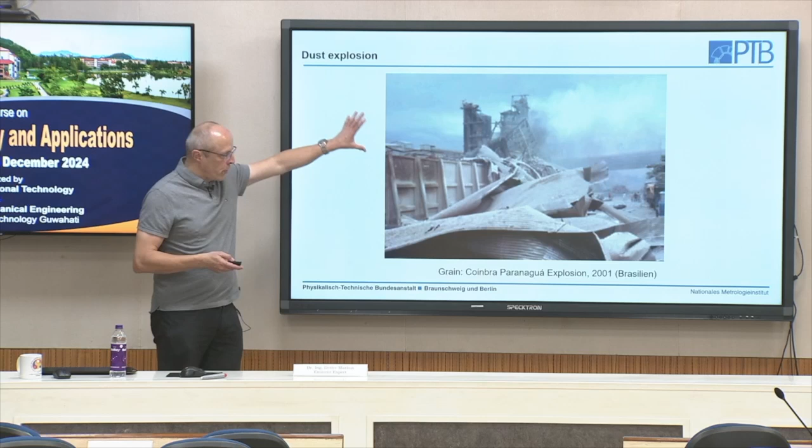So we can continue here this lecture about explosion protection, and now we will focus on dust explosions. Here, I have shown you a grain dust explosion or a sugar dust explosion. So dust explosions occur quite frequently, at least in Germany.

But often, or normally, we have measures to avoid the consequences of such an explosion. So if you use filters, there's maybe an explosion in the filter, but then there is some pressure relief. The explosion pressure can leave the system, and we will just continue with the process.

Dust is here better to handle. However, of course, it's important to consider the consequences of such an accident. So even though sugar, something which looks not dangerous for us, can burn as a dust, and then we have these fatal consequences. So what is dust?

Dust means small solid particles in the atmosphere that settle through their own weight. So after some time they will finally reach the bottom, but they remain in the atmosphere and form a dust-air mixture. So they normally are quite small. The maximum particle size does not exceed 500 micrometers.

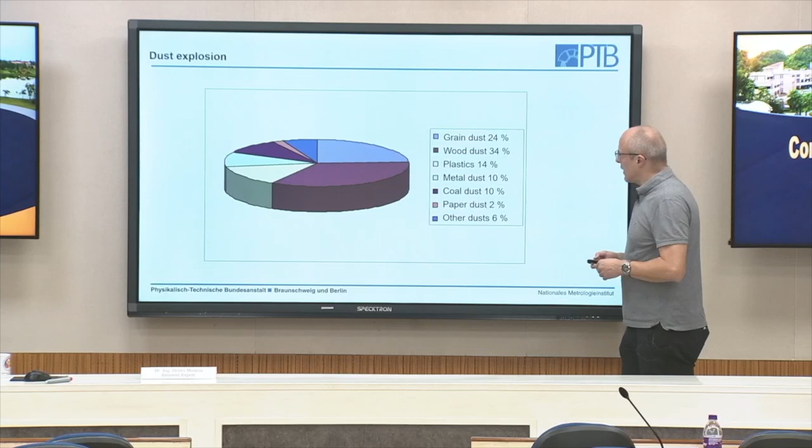So we have somewhere deposition of dust, for example, aluminium dust, and then there's some liquid. So we have an aluminium water mixture. So some reaction may start here, take some time, it starts to glow, and then this glow nest may fall down into the pipe system again, reaches the filter, and suddenly you have a big explosion.

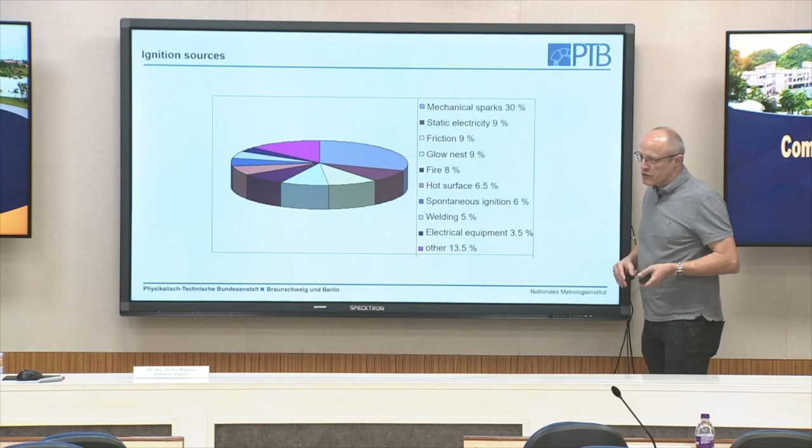So there is a horrible example from China, where they used to polish aluminium tires, and such a glow nest then leads to a devastating explosion, and aluminium burns with 3,500 K. So I think 75 died immediately and others died later due to the burning consequences. Of course, it's difficult to have a proper hospital system to take care of such a catastrophic accident.

So when you deal with dust, you have to consider some additional ignition sources compared to flammable liquids and gases. Of course, we have the same concept here. We use safety characteristic data to classify our combustible dusts.

And here we have, in addition, also the characteristic of deposited dust, because mainly these dusts are lying on some surfaces. So burning behavior, smoldering temperature, spontaneous combustion are of interest. How fast does it burn on the surface and so on.

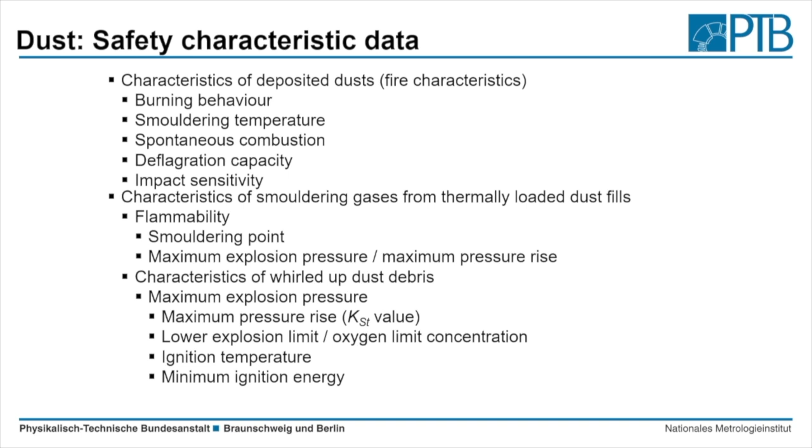Then these dust layers, if they are heated, so that if they layer, for example, above an electrical motor, they're heated from the surface of the motor - do they produce flammable gases? Carbon monoxide or other hydrocarbons, for example. And so we have to check the flammability of these smoldering gases.

And finally, we have the characteristic of the whirled up dust debris. That means the dust-air mixture we have to consider. And here we have several quantities, so it's more or less like with the flammable gases and liquids. So we also have explosion limits here.

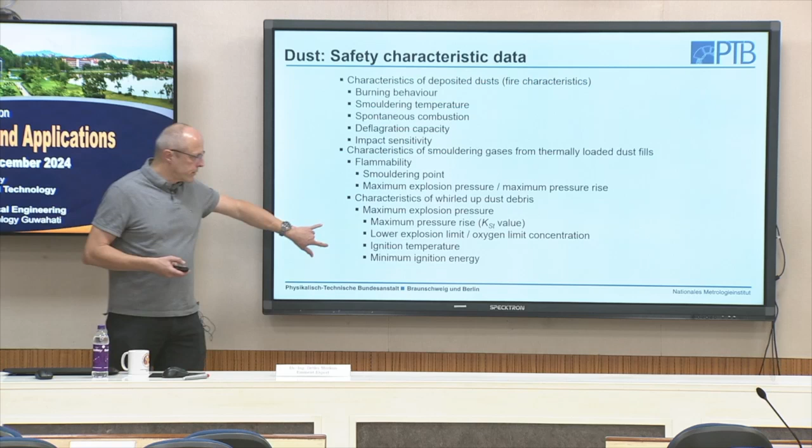We have an ignition temperature, but the two most important criteria here are the maximum pressure rise, the KSt value, and the minimum ignition energy. So these two quantities are normally used to classify our combustible dusts.

So a very important parameter, of course, is the particle size. So iron, as a big block of iron, does not burn. But if you have fine iron wires and put it in an oxygenous atmosphere, it directly starts to burn. It depends, of course, on the surface to volume ratio.

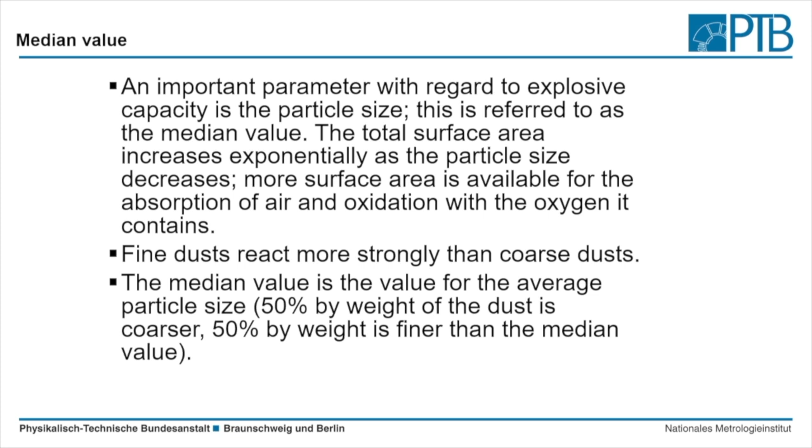So the surface area increases exponentially when the particle size decreases. So fine dust reacts more strongly than coarse dust. So an important value here is the median value for the average particle size. 50% by weight of the dust is coarser, 50% is finer than the median value. So for a safety assessment, it's not important just to know, okay, I have aluminum dust here. You also have to know the particle size distribution for safety measures.

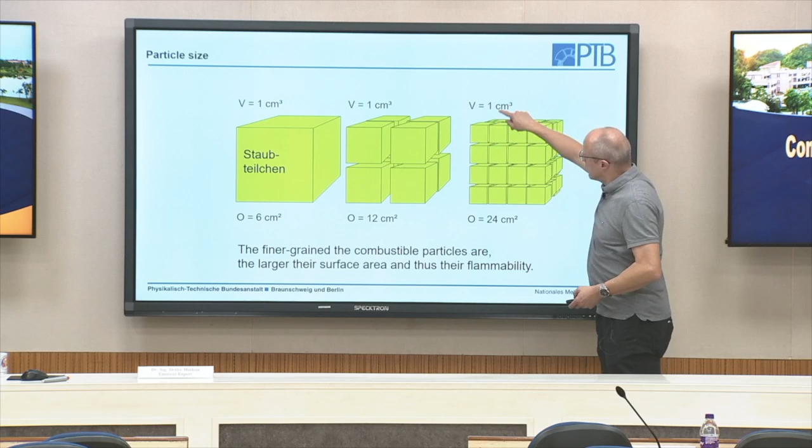So here we have the explanation for this. If you have a cubic centimeter particle, you have a surface of 6 square centimeters. If you have the same volume split into smaller particles, say 4 times 4 times 4, so 64 particles, same volume but of course much larger surface area.

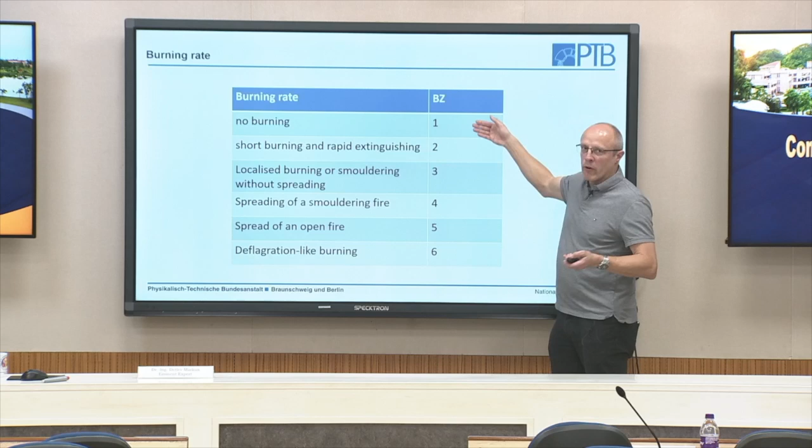So when we look at the burning behavior, there are some classical tests. You have a line of dust, and then several ignition sources which you hold at the end, and then you just check does it start to burn and how fast does it burn. So you classify your substances here. You have something like salt, no burning. You have something like explosives - if you ignite them, of course, they burn very fast.

Smoldering temperature, as I said, it's important because we need to know does the deposit layer of this dust smolder, and at which temperature they start to smolder. So you have this dust layer, and you just put a hot wire system on top of this surface, and you just check does it start to burn or not.

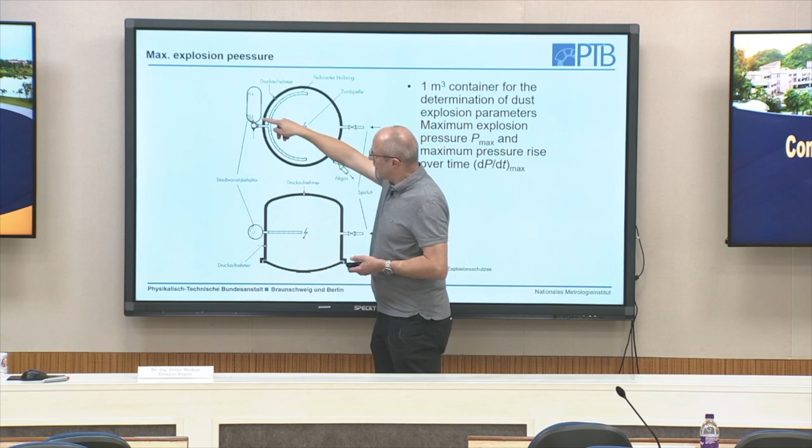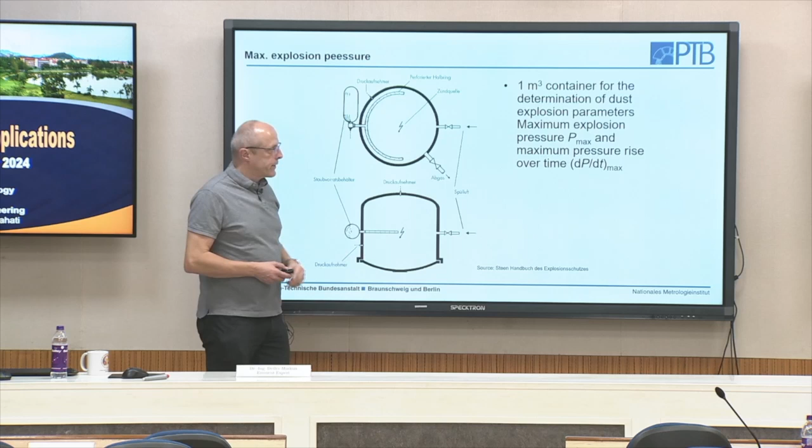So now coming to the important quantities: maximum explosion pressure. Here we have a system, this is an old classical setup, a 1 cubic meter vessel. We have a vessel for the dust. This vessel has an overpressure, so you open a valve, and then through this ring here we have some holes. We blow the dust into the vessel, and after a given time we ignite the mixture and measure explosion pressure and pressure rise.

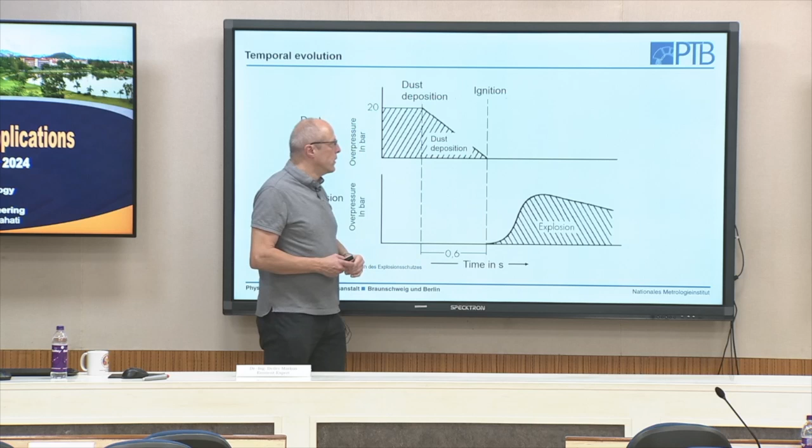So here you see the temporal diagram of the setup. In the dust depot we have an overpressure, 20 bar. We open the valve, the pressure reduces, and of course we can adjust the timing. Here the ignition is at the end of the dust deposition, and in the explosion vessel then we see after ignition a pressure rise due to the explosion.

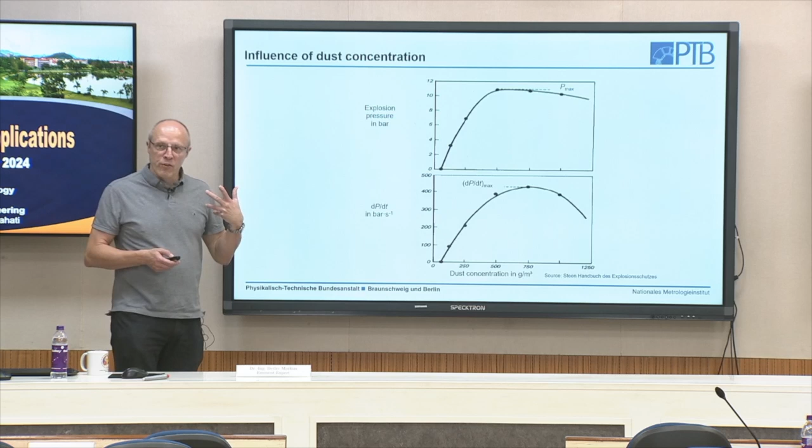This of course depends on the mixture composition. So we have a maximum explosion pressure for different mixture compositions, and for one specific dust concentration we yield a total maximum value. This is then the value we need for the safety assessment. The same we see for the pressure rise, it also depends on the mixture composition. Therefore we not just have to perform one experiment with a given dust, we have to vary the concentration.

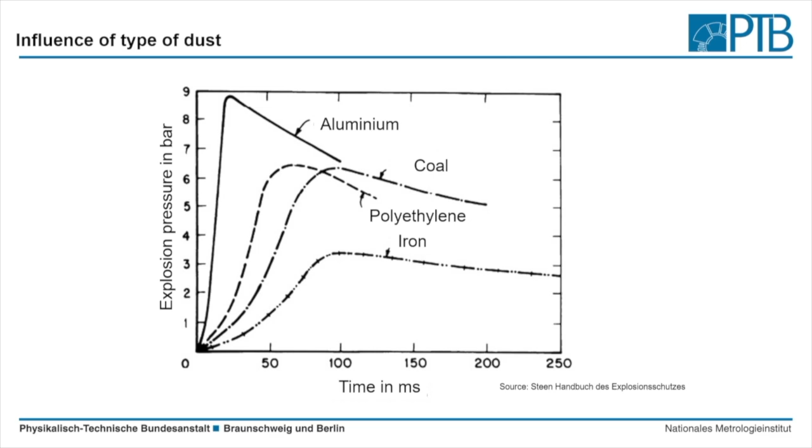Then of course it depends on the type of dust. We see the same effect here. We have dusts which burn quite slowly, so cooling effects are of importance here. They have very low flame velocities, so slow pressure rise and low maximum pressure in case of iron. And this of course changes if we consider aluminium - here we can reach much higher pressures, and we have a much faster pressure rise.

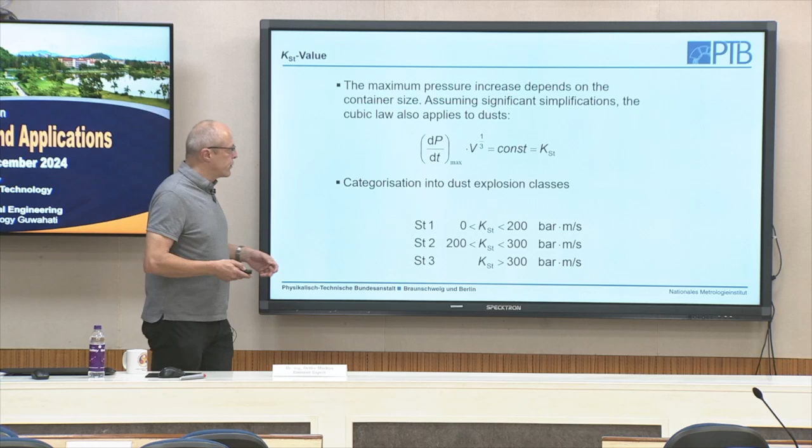So finally we use the concept of a KST value here. This is, together with a minimum ignition energy, the most important value, at least in Germany, if you consider flammable dusts. We have several dust classes: dust class 1 has the smallest KST value, and the critical class, dust class 3, has 300 bar meter per second. I've checked literature and I was astonished - also in English literature I found this KST. So KST stands for Staub, German for dust. I'm not sure if it's a concept only used in Germany, but this seems to be also used in other countries too.

So dust also have explosion limits. There is of course a lower explosion limit, which is normally in the range of several grams per cubic meter, and we have an upper explosion limit which is in the range of several kilograms per cubic meter.

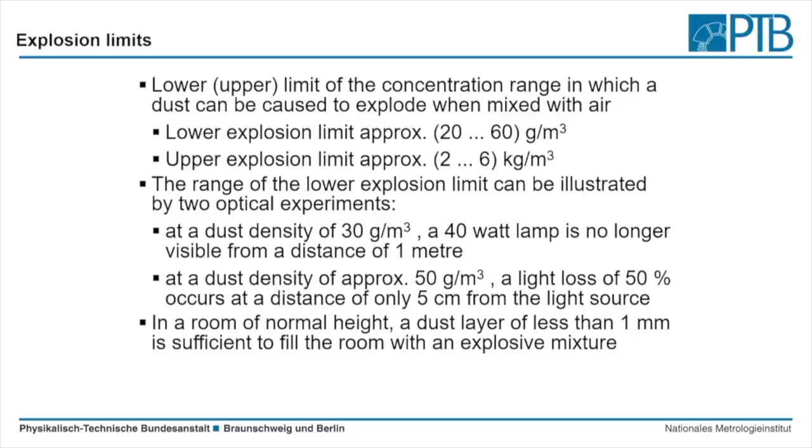And for me it's always astonishing when I look at these two optical experiments. If we have a dust density of 30 grams per cubic meter, which is quite in this range of the lower explosion limit, we cannot see a 40 watt lamp after a distance of 1 meter - so we already have a very dense atmosphere. And the other example, 50 grams, again in this range, a light loss of 50% occurs after 5 centimeters. So these are already quite dense mixtures.

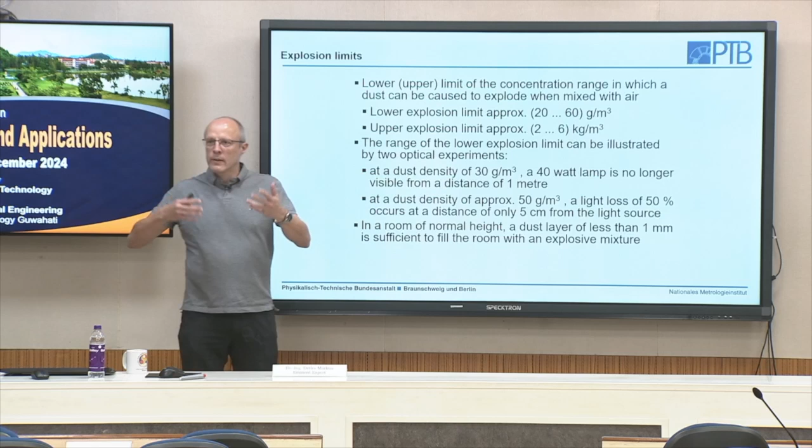And one final example, which maybe we should remember, is that we have to clean our houses more often. If we have a dust layer of less than 1 millimeter on the floor of a combustible dust, and we whirl it up, then it's sufficient to fill the room with an explosive mixture. So for me, this is a contradiction here - I'm not an expert with dust. This seems to be very little, and it's astonishing that this already gives us such a dense dust-air mixture.

And so you have seen this Hartmann tube before. So the experiments are performed here in a similar way. We have some dust here, then we use some pressurized air to whirl up the dust, and then we start a quite strong spark with an energy also in the Joule range, and check, can we ignite the mixture, yes or no. So typical setup. After an explosion, this opens, pressure relief, then it closes. We can clean the setup and perform the tests again.

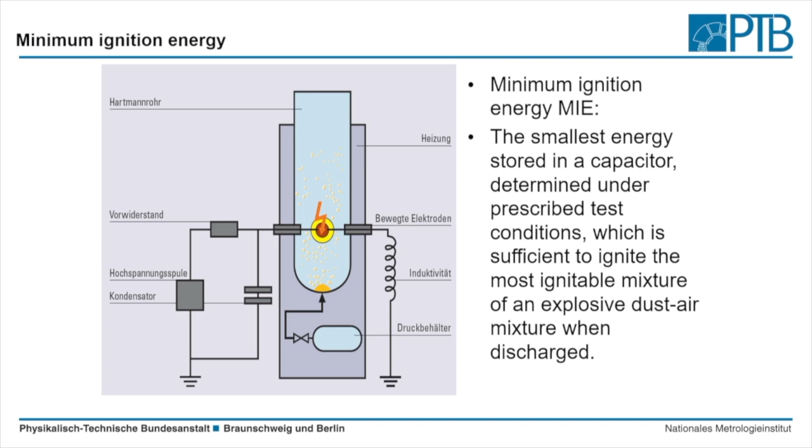Minimum ignition energy is the second most important quantity. We have the same concept here. We have some energy stored in a capacitor, and the energy here is then again depending on the capacitance and the breakthrough voltage we have, finally leading to ignition.

And we have again a similar concept. So we have a dust layer which is then whirled up by pressurized air. And so of course this depends on a lot of quantities. Therefore, if you check literature, always be careful. It's not the one value you can find. As we have seen, the particle size distribution, for example, is very important for this.

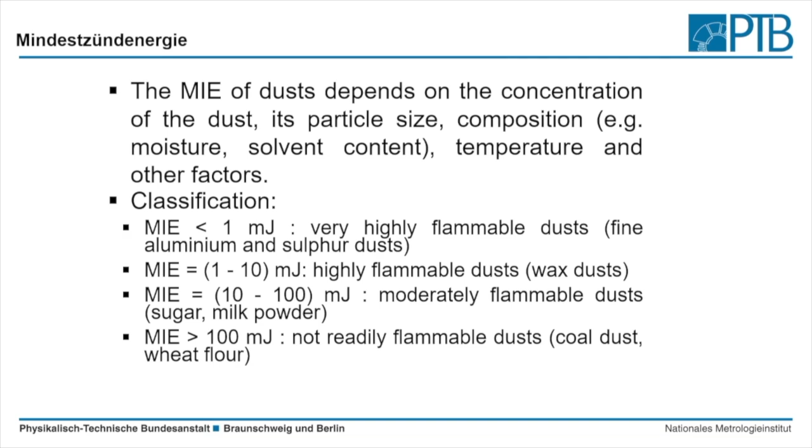But mainly the usage here, we have 4 categories. If we have a minimum ignition energy below 1 millijoule, so the most combustible gases in group 2A have an energy, I think it was 0.2 millijoule, above 0.2 millijoule. So here we are already in the range of the ignition energy of a lot of hydrocarbons. But this goes up to over 100 millijoule. Also an example here is wheat flour.

Nevertheless, wheat flour is quite common dust. A lot of accidents occur also with wheat flour, even though it has quite high ignition energy. But this gives us a classification, and together with the KSt value, based on these 2 values, we can select proper safety measures for a safe operation of our system.

There's only one slide for hybrid mixtures. There is some ongoing research also at PTB for this topic, but it's difficult to discuss.

So for example, in mining areas, so we have, I think I've given the example yesterday. Of course you have coal dust, but normally this coal dust is not so critical. And most often you have a layer of coal dust, so not a dust-air atmosphere. So this is quite easy to handle with respect to safety.

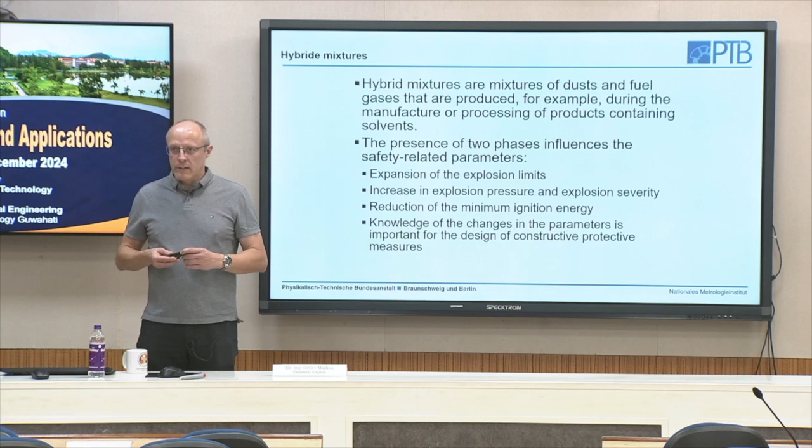So with this, I would like to close this session. So we have had a short discussion already before we started this, but maybe we can continue it. So do you have any question concerning this part here?

So, okay. How to decide it is explosion or it's burning? Is it based on pressure data or something else? Okay, what is an explosion for you? What is a burning event? Yes. How to distinguish between it's this?

So in German we have the word Verpuffung. I haven't found an English expression for it, even though if I use DeepL, it always gives me explosion or deflagration. Explosion means we have a sudden change in temperature and pressure.

So this is maybe something we can use. If there is a pressure rise of only 5%, there is some combustion, but if it's below 5%, we say this is not explosive. How do we decide that number? We use standardized methods, as explained for explosion limits, using the bomb method where we ignite in the center. If the pressure rise is below 5%, we consider this not flammable. The idea of the standardized method is that we'd have to perform thousands of experiments for thousands of mixtures, and we don't know all the chemical reaction mechanism details, so we cannot calculate it properly. Therefore, we use a threshold value, and until an accident occurs showing this threshold is not okay, we keep using it. If we find we need to be stricter, we adjust the threshold.

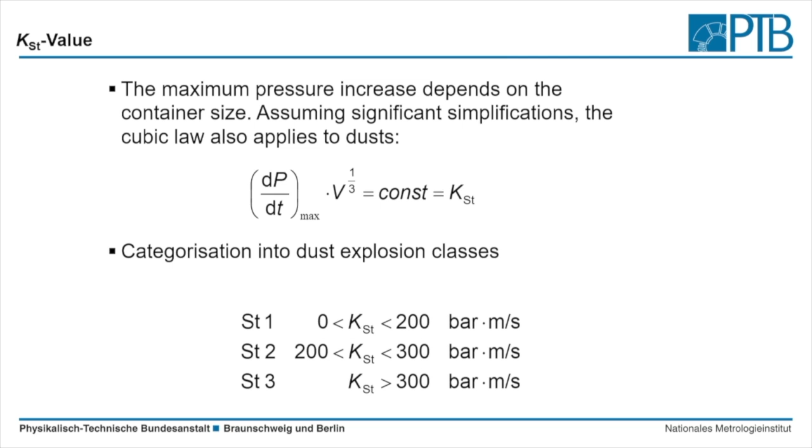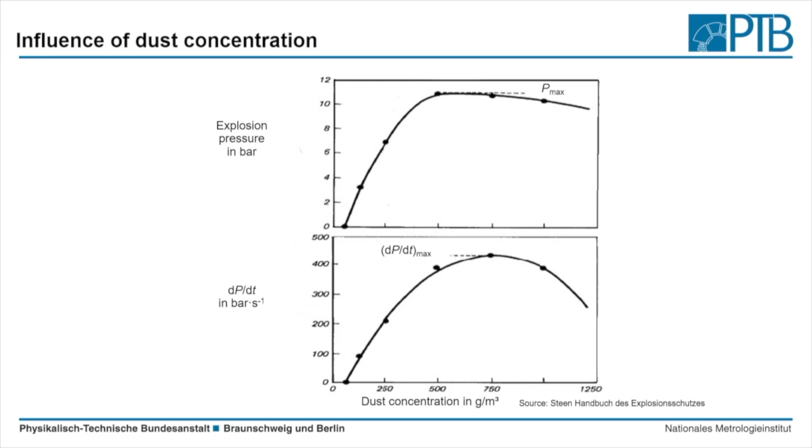This means how fast the pressure rise is, how fast these dusts are burning. But it depends on what particle size distribution and dust concentration were used in the experiment. This is normally covered by performing the experiment with the same dust at different configurations. So ultimately it depends on KST, and KST is a function of dust concentration as well as particle size.

If you have to handle combustible dust, first check the literature - are there safety characteristic data for your substance? If you have aluminium dust, the probability of finding data is quite high. But if you have a new material, there's no data. What's mandatory in countries like Germany is that before you start working with this kind of material, you have to measure this data yourself. And it's only valid for your specific dust - your specific particle size distribution. You cannot change your process, get a different particle size distribution, and use the old safety characteristic data. You have to measure it again.

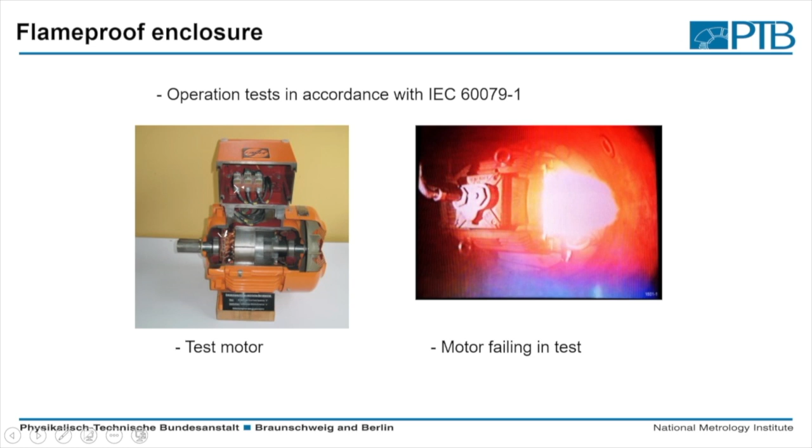And the other, more critical test, especially when we deal with hydrogen, gas group 2C, is the so-called flame transmission test. Such equipment has a lot of different gaps - here between the bearing shield and the housing, and here between the cap of the terminal box and the terminal box itself.

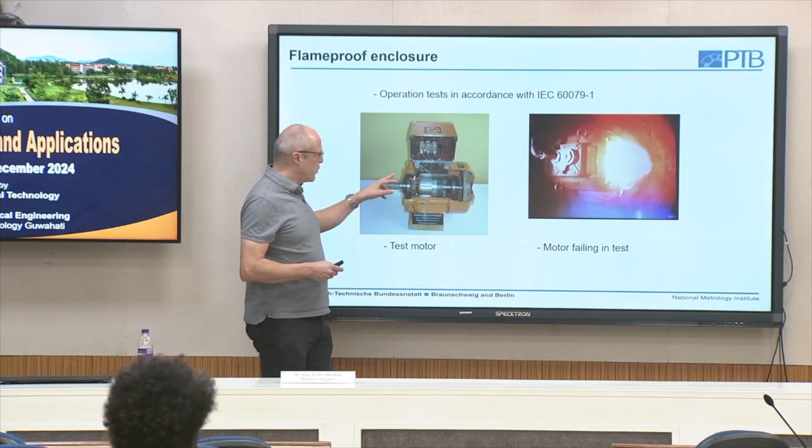You have specific requirements given by the standard which you have to fulfill, but there's always a flame transmission test at the end. Even though your construction follows the minimum requirements of the standard, you ignite an explosion inside this geometry and check in your test lab whether there is flame transmission. You perform this test at different positions, igniting at different points, and repeat it 3 or 5 times depending on the gas group you're interested in.

And this is an outcome of such a test. Here the flame is going this way, from the inner side to the outer side. So the motor has failed this test and has to be redesigned and retested again before it can be sold in the market.

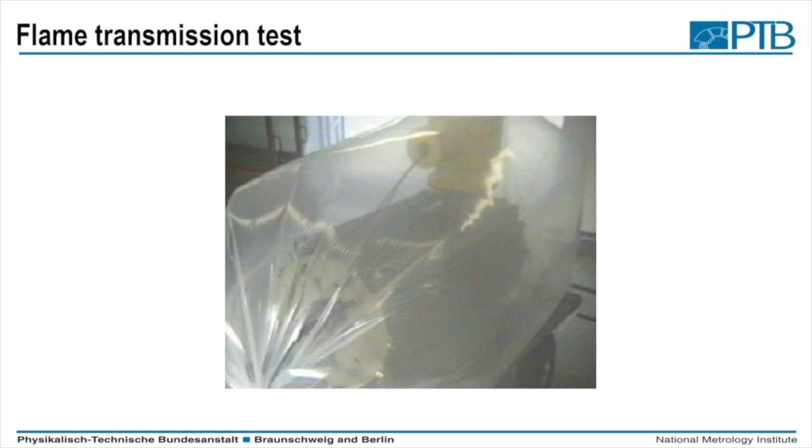Here we see such an example outside an explosion vessel. We have a foil, and both inside and outside this motor the atmosphere is filled with hydrogen and air. Internally an ignition was initiated, and you can see there was a flame transmission at this area, and then the outer atmosphere explodes too.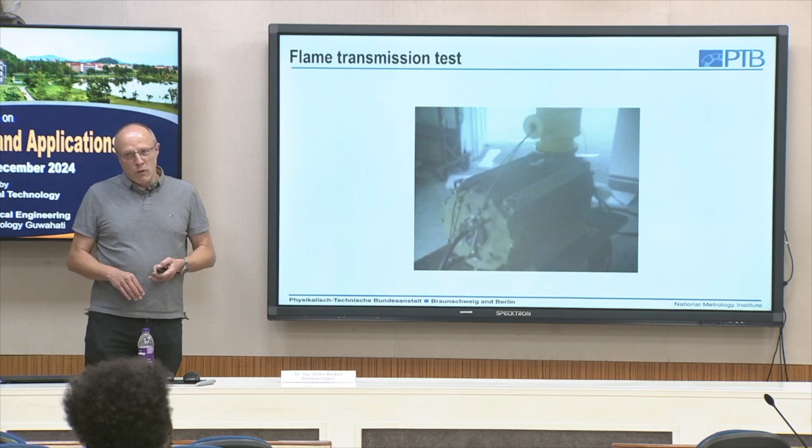This motor was a special machine already sold. It failed, and needed to be redesigned. It failed again, and needed to be redesigned again. So they could only bring it to market with some delay, which cost them a huge amount of money. The problem is that these tests and certificates you need are always achieved at the end of the construction cycle, and people always blame the test houses for needing too much time. But in this case it was maybe not the fault of the test house why this motor was not sold on time.

So flame transmission, flame quenching - this is what we are talking about. Normally, as we've seen for a flame-proof enclosure, you have an explosion inside the equipment, and you want to avoid an explosion of the outer atmosphere. So the flame has to be quenched in the gaps you have - no flame transmission should occur.

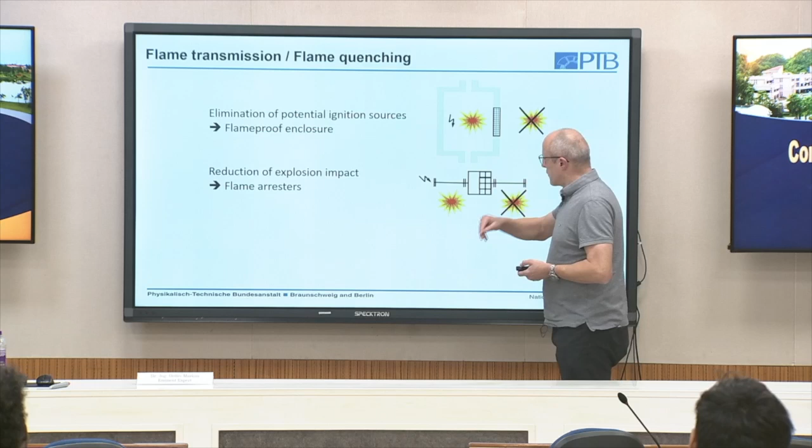The same is true for flame arresters. If we have long pipes and want to stop an explosion in such a pipe, or avoid the development of a detonation, we install flame arresters in these enclosures and pipes. An explosion starts at one end of the pipe and then reaches such a flame arrester, and the flame has to be stopped.

It has to provide reliable protection against flame transmission, and of course high chemical, mechanical and thermal resistance, because it may be installed in an aggressive atmosphere. A flame-proof enclosure, for example, can be installed on oil rigs where there is a lot of salty water, so the lifetime quality has to be assured.

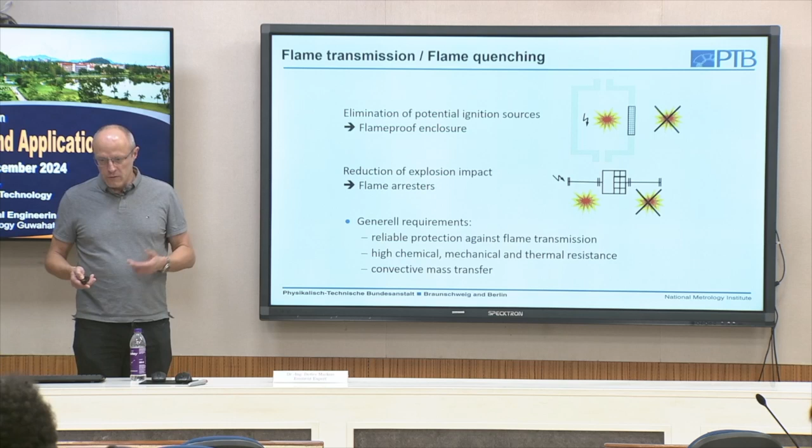But at least for flame arresters, convective mass transfer should still be possible. In this pipe you always have a mass flow in one of the directions - that's the main idea of a pipe, to transport fluid from point A to point B. So there should not be too much flow resistance due to this flame arrester, but on the other hand it should stop a flame when one comes through. This is the constructive problem here.

So how does quenching occur? Professor Sahu has also explained this on one of the slides. When there is a flame moving through a small gap, first of all you have cooling at the wall, heat losses. Then you have stretching of the flame front - if you have a large pressure difference between the two compartments, as you've seen in the morning, there's always an acceleration through this nozzle, through this gap, and we can reach the sound velocity of the hot gas there.

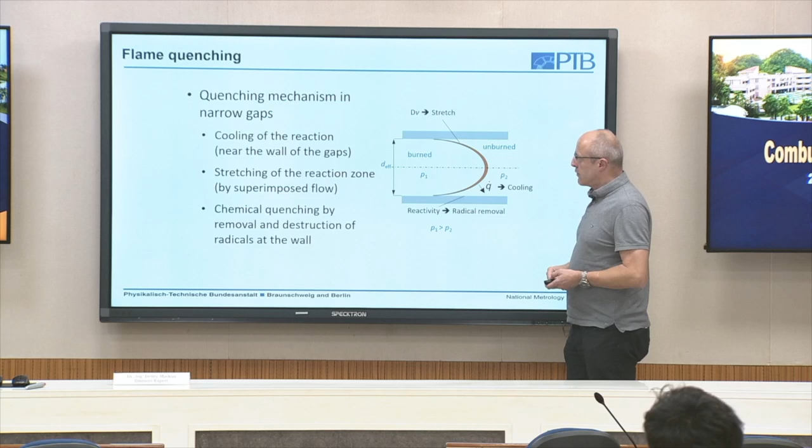It's like blowing out a candle - if you stretch the flame, you may blow it just out. This can already quench the flame sufficiently. And then you have wall reactions, so radicals may be removed and destroyed at the wall, and then can no longer take part in the reaction.

Of course it depends on the superimposed flow we have. You may find in literature the quenching distance as a factor, 0.6 something for hydrogen in millimeters. That is a distance when there is no superimposed flow interacting with the flame, so it's just the flame inside the gap. You have maybe a flow velocity equal to the flame velocity, so the flame stays at a given position, and then you have heat losses to the wall and quenching of radicals. So this is a given parameter.

And now we can have superimposed flow. We can have endurance burning flame arresters, where on top of these we can have a steady flame. So it should be avoided that from the top the lower element of the flame arrestor reaches the auto ignition temperature of the mixture. But as there's a superimposed flow from the bottom to the top, this helps us, so this gap can be larger than the quenching distance. But we also can have a flow which is of course not helping us.

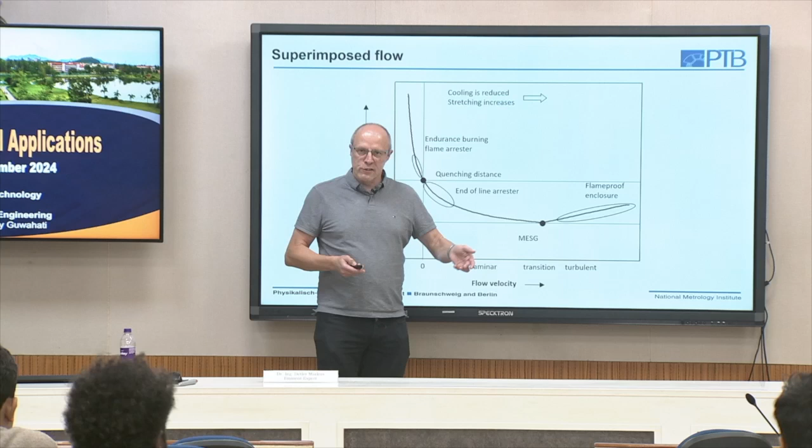And then if it becomes too turbulent, that means our hot gas which leaves the gap has a high velocity, mixes very fast with the surrounding atmosphere, and maybe too fast, so the cooling is dominant. So here velocity helps us again, so the gap can increase again. So this is a simple sketch of how this quenching effect depends on the flow situation we have. So, of course, depending on the application, we have to focus on different main criteria.

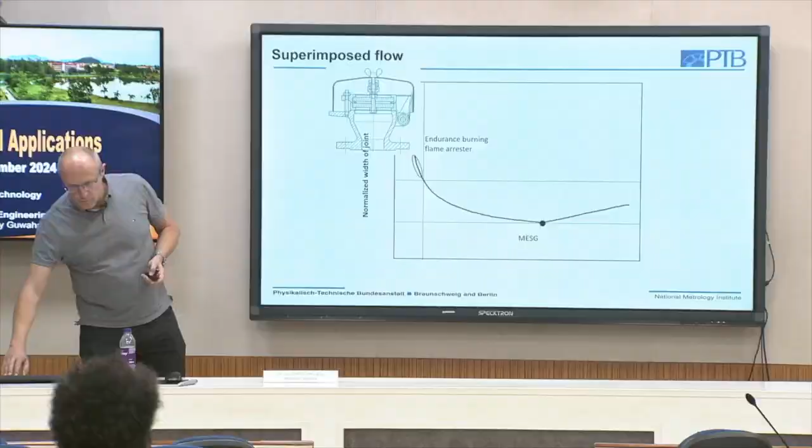So such an endurance burning flame arrester you can see here. This, for example, sits on top of a pipe, or tank sorry, so that should be breathing on the tank. The tank is in the sun, so it heats up and cools down along a day and overnight, so there has to be a pressure relief to the outer atmosphere, so inside the tank we always have the surrounding pressure. So such an endurance flame burning arrestor is open to the surrounding. Here is a cap to protect against weather, and it's open here and here, so it can breathe here, so the flow can go this way or this way.

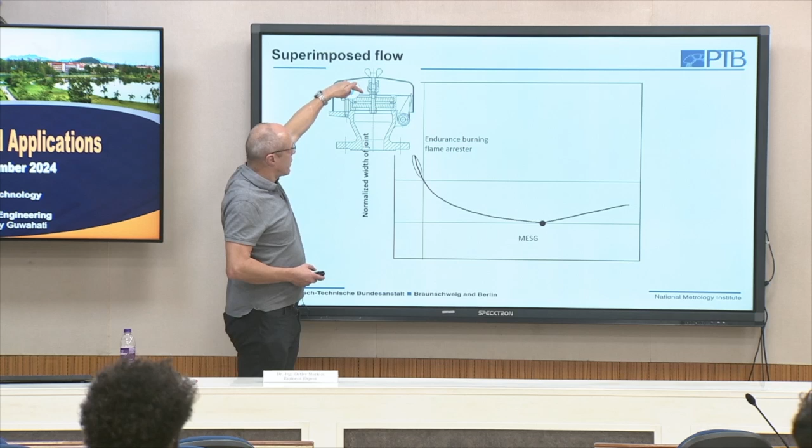And what of course should be avoided, if it's breathing outside, there is a possible explosive atmosphere on top of the tank, and this can be ignited. And of course this flame should not go into the tank, which would be a catastrophic failure. But of course what we have is there can be a steady outflow out of the tank through these flame arresters, so we can have a steady flame here on top of these arresters. So the flame is burning, and the temperature at the lower part of this flame arrestor element should never reach the auto ignition temperature. So it's a question of how much heat is transported away from the flow.

This helps us here, so we can be larger than the quenching diameter. But of course then heat transfer in the construction is of importance, so we have to avoid or minimize heat transfer from top to the bottom. And you see here a quite complex geometry where we use classical crimped ribbon flame arresters, where we have two bands which we put together, and where we have small triangular gaps, so the flow in this direction is optimized. However, also the heat transfer in this direction is optimized.

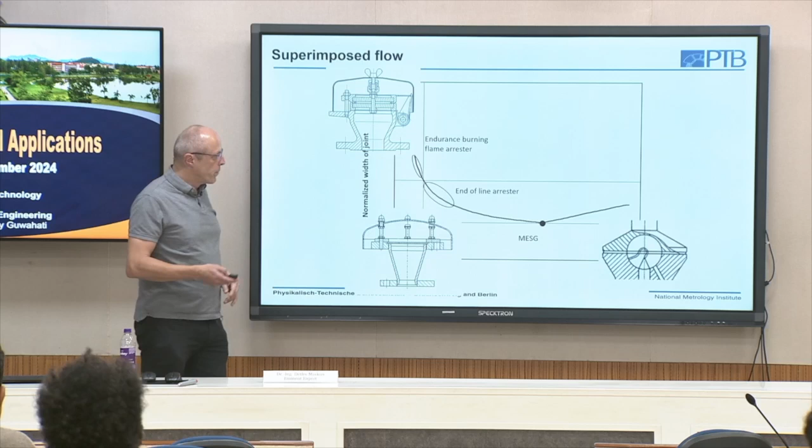And here we have an element of sintered fibers, and you see it can be much smaller, and we only need one of these elements. So the advantage is the heat transfer in this case is much better to the left and to the right, and the heat transfer from top and bottom is worse or better in this example than here. We can have end of line arresters. Okay, this we have discussed.

So where we have to avoid just the flame transmission, we don't have a steady flame on top of such an element. There's just an explosion coming from the outside, hits the element, no flame transmission this way, or more often occurring the other way: the explosion comes from here, and outside we have our chemical plant. Of course, the explosion should not come from here to the outer part of this pipe.

So end of line arresters deal mainly with stopping the explosion in one way. We already need a gap width smaller than the quenching distance, because we have a superimposed flow in the direction of the flame, which then supports the flame.

And here, when we come to this turbulent region, we have the flameproof enclosures. So I will show you an example with a gas sensor here, how we can optimize the configuration.

So a gas sensor should breathe, of course. There must be some gas entering the gas sensor, coming in contact with the elements here, where we measure the amount of combustible we have in the atmosphere. So breathing must be possible, but if an ignition takes place here, it has to be stopped here. There should be no flame transmission from the inside to the outside.

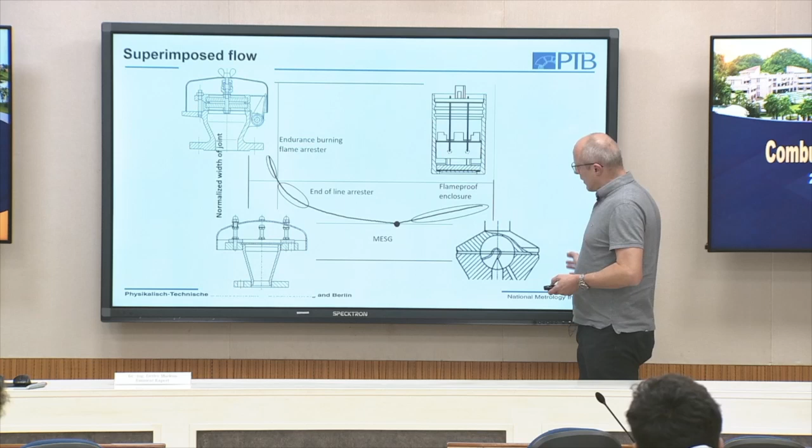And here we see this element of the standard apparatus to measure a maximum experimental safe gap. So we have a small vessel of several cubic centimeters, and a larger vessel around this part, and we have here flat gaps, circular flat gaps, and we can adjust the width of the gap. We ignite the mixture here and check if there's a flame transmission, yes or no. This apparatus is optimized in a way that we hopefully find the smallest value where we see or don't see a flame transmission - this so-called maximum experimental safe gap.

So how does it look now in reality? After discussing all the theoretical details, here we have our flame arrestor for endurance burning tests. So how does it work?

So here we have a tank. We have an inlet here, so we can have a steady gas flow, which can be adjusted, of course, of combustible - it depends on the requirements concerning the specific flame arrestors where it should be used. And then this vessel here is closed, so the gas flows through our flame arrestor here from top to bottom with a given velocity.

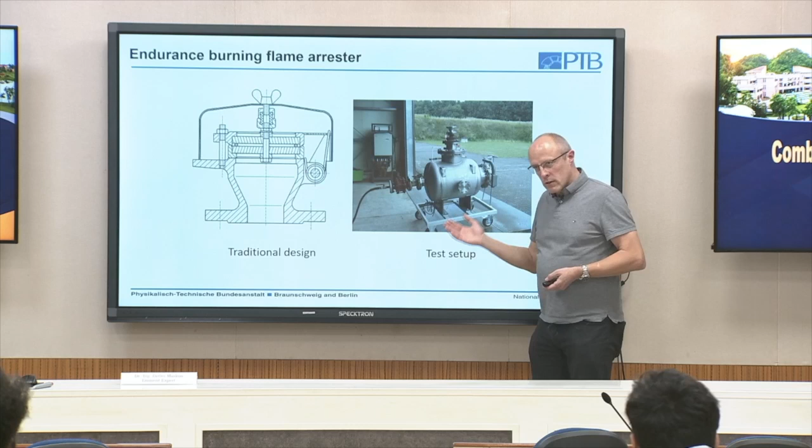And then we will start the test. So we ignite the mixture on top of this flame arrestor and check if there's a flame transmission from here to the inner side of the tank. Here is a pressure relief element which then opens, so we can clearly see it has failed and can stop the test.

So what we do during such a test - here we see 1, 2, 3, 4, 5, 6, 7, 8 positions for thermocouples. So we just insert some thermocouple elements to see how the temperature is developing during such a test. And what we are really interested in is, at position 1 we have the steady flame, and we are interested in the heat transfer from here to here - at which time we reach which temperature below, at the lower part of this element. The second interesting part is: is there heat transfer in this direction? So how is the temperature profile on top of the surface and then at this position here?

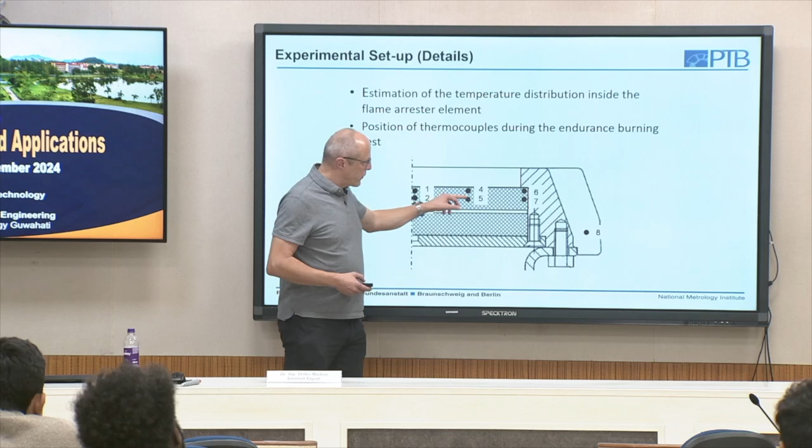So you can see the outcome of such a test. You see here at position 1 and 2, we get a maximum temperature of 600 degrees Celsius. The test takes some time - we're talking about minutes here. And you also see that at position 3, we reach 250 degrees Celsius, which is in the range of the auto-ignition temperature of the n-hexane we have used here.

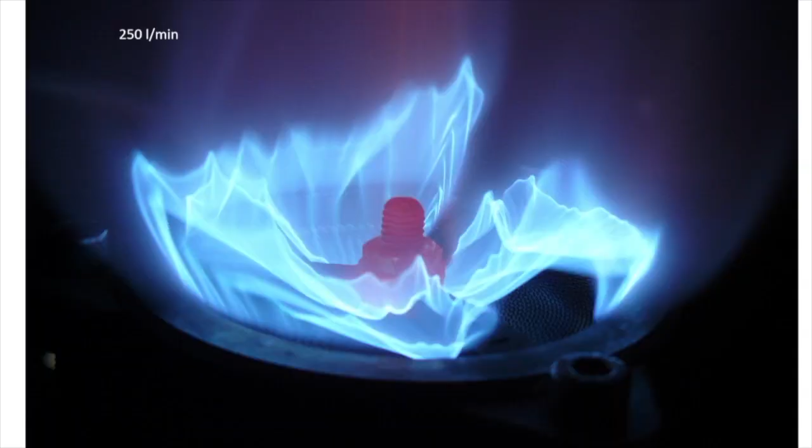But of course we haven't had a failure. The disadvantage you may see here is the small gaps we have - again, these gaps going this way, so to have optimized flow in the case when we don't have a flame existing here, and therefore the heat is transferred perfectly in that direction. But the bigger problem is here the screw - we always need such a screw to fix this element, and of course here we have perfect heat transfer from top to the bottom.

What I have not mentioned is, of course, we adjust the flow rate to find finally the maximum surface temperature. So if the flow rate is too high, the flame will lift, so it's colder on top of the flame arrestor. And if it's too slow, the flame will move into the flame arrestor element - first quenching appears, and again the temperature will decrease. So we always have to adjust the flow velocity to find the maximum surface temperature, and then we can perform the test.

So how does it look like at optimum temperature? Here we see local lift up of the flame. This is the flow rate where we yield the maximum temperature. You see the red glowing, so the chemistry is taking place directly on top of this flame arrestor element, and the maximum temperature is reached.

And then, of course, it is a question for us how this heat transfer goes from top to the bottom. So how can we optimize such a setup?

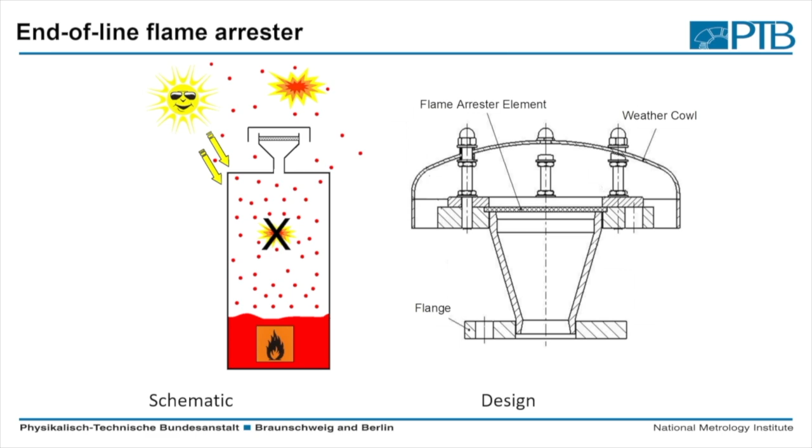So can we optimize it so that we finally have only one element? This breathing I have explained to you, and this design I have explained to you. So the question is now, how can we stop the flame here, and how can we optimize the heat transfer?

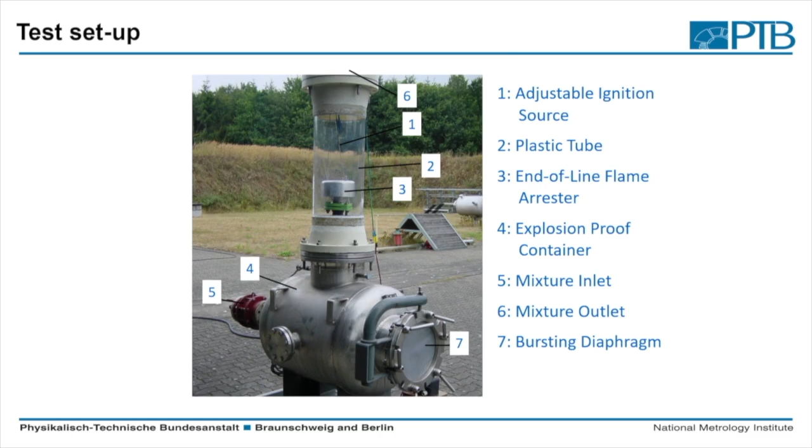So here I show you the test setup. Now we have a pipe here, which is filled with our mixture, and this is open to the top, so there is no pressure increase during the explosion. We always have around atmospheric pressure here at top of the head, so there is no superimposed flow going in this way.

So here we see the overpressure, so we have a quenching of the explosion. We have an explosion outside, it comes to the flame arrest element, and it has to be quenched. So we have for a short time a superimposed flow, and then we have this fire on top of this element for a longer time.

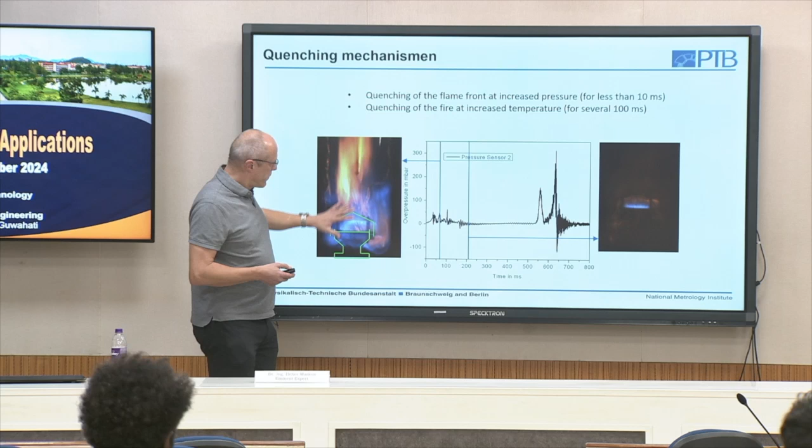Here you can see an image of such a test. Here we have the explosion outside in the tube I've shown you, so the flame arrestor and everything is in range of this fire. Then this explosion stops, and here we have a steady flame on top of the flame arrestor element.

So now I talk again about superimposed flow, but I'm on the other side. In this time we have a flow in the direction where we want to stop the flame. The explosion occurs here in the inner part, and we want to avoid an explosion of the outer atmosphere. So we are in this turbulent region, slightly larger maybe than the MESG, but clearly near the MESG value.

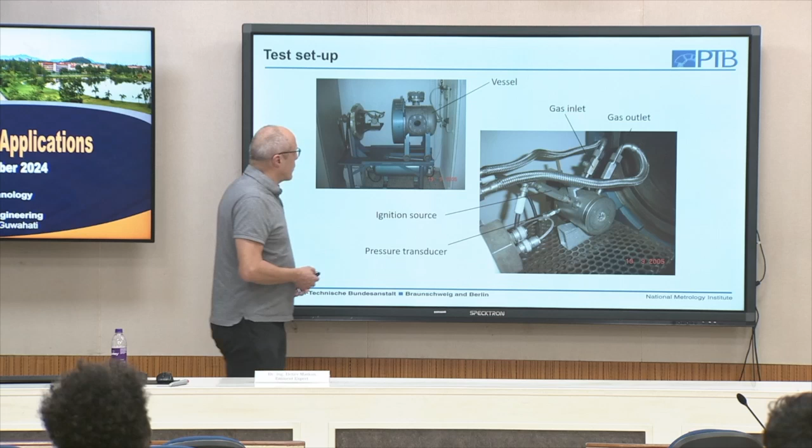And I show you the test setup. We have a small explosion vessel, which can be closed, and we can prepare a proper mixture. Here we have a tank where we have the mixture, so we can evacuate this system. Here we see the test sample; this is then also evacuated. And then we refill our vessel and test sample with combustible air mixture.

And here you see this setup in detail. For this specific configuration, we also have gas inlet and outlet, so we don't have to use this vacuum possibility; we can fill it directly with gas mixture. Here we have an ignition source and spark plug, and we have a pressure transducer. And the interesting element sits here in front of the vessel.

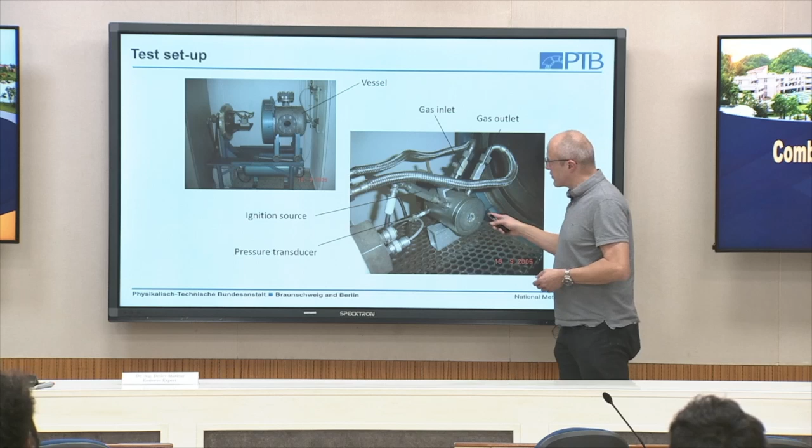So we have an explosion inside, and the question is, does the flame move through this porous structure? Is there a flame transmission, yes or no? And here you can see again such a crimped ribbon element. For hydrogen, very small holes are necessary, but you can buy this in the market. And here we see some OH-LIF experiments, showing how this flame transmission occurs.

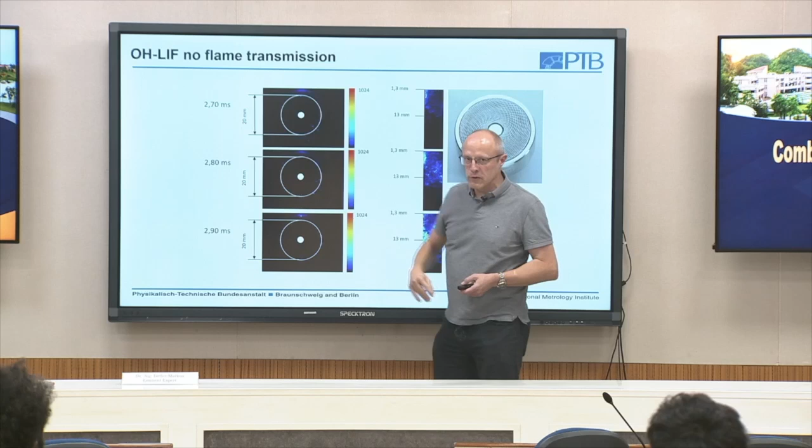So here we look from the top, from the bottom, so the flow is going this way, the hot gas is coming towards you. And here we look from the side, and we don't see a specific failure here.

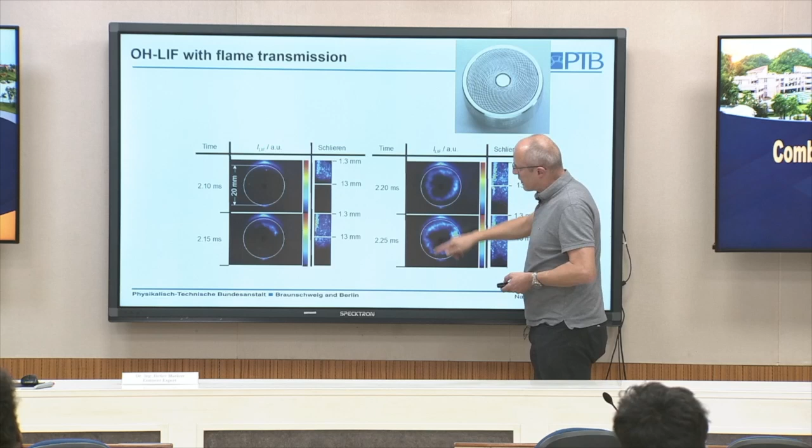And so you can see here where we have the larger holes, a flame transmission can occur, and this then ignites our surrounding.

Now we look at such a sintered fiber element. So we have very thin metal fibers sintered together, giving a porous structure. Of course, flow is possible through this structure.

And with no ignition, we can see a lot of chemistry taking place. There are, of course, always some larger pores. And at these larger pores, we see some OH, so there's hot reactive gas leaving our porous structure. But in this case, no flame transmission can be observed.

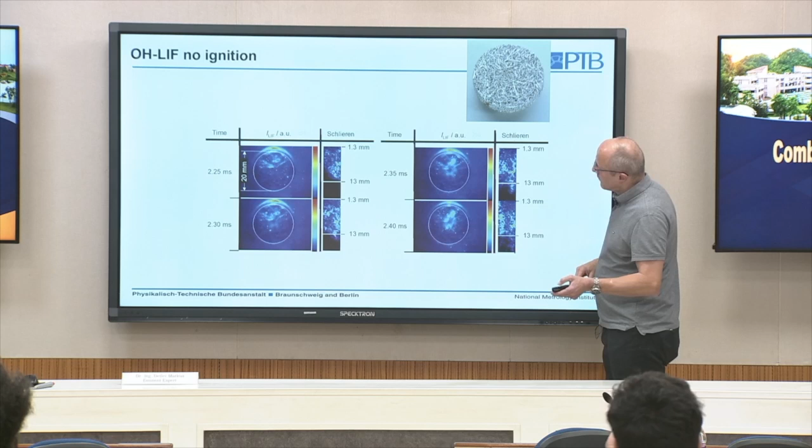So the question finally is, what is happening here? Of course this can fail too. I've shown you the ignition cases, because the big difference here is there's always something like a bigger pore. In the earlier example with the crimped ribbon element, you saw there's a large area where flame transmission occurs. Here we have to focus more on the bigger pore.

And this is one of the mandatory tests you have to perform if you want to produce such an element. So you can check the outcome, and then maybe you just replace this element.

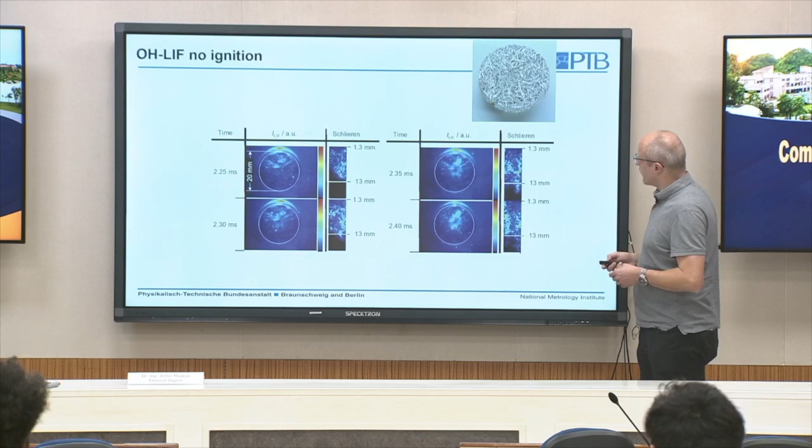And this is due to the fact that we have a hot surface, and the ignition position is now at the hot surface. In the direct flame transmission case, the ignition is somewhere in the flow which leaves the nozzle; here the ignition is directly at the hot surface.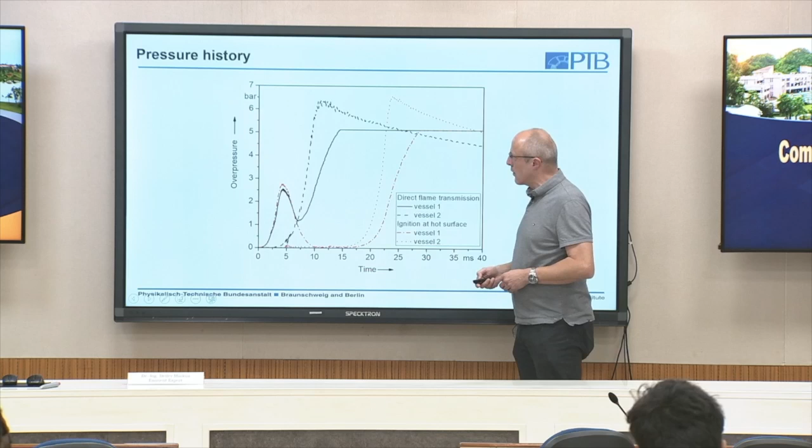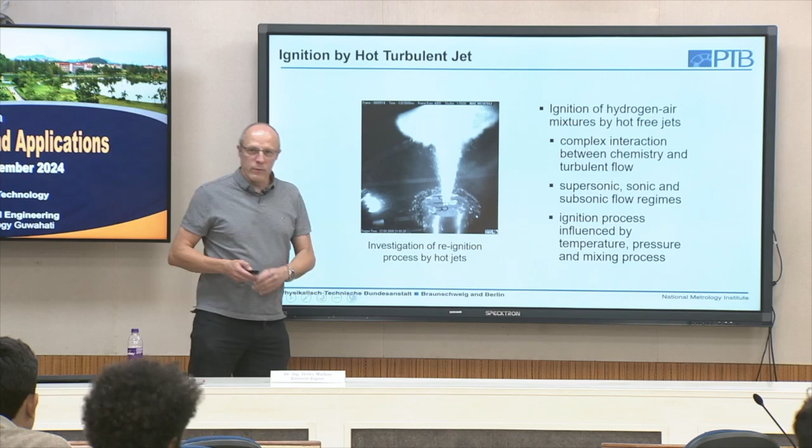So there's a second optimization parameter we have to consider. When we look at such an ignition by a hot turbulent jet, which we've seen already, we have a typical outflow. Here the explosion starts, here we have a nozzle, and then we have a hot jet leaving this nozzle, mixing very fast with the cold surrounding atmosphere.

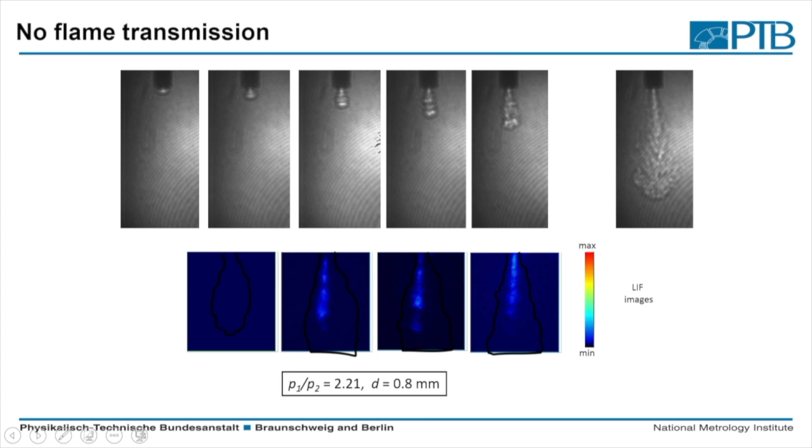How does this influence the ignition event? So here I show you some experimental results. Here we see Schlieren experiments, and here we see again OH-LIF images. Here we have no flame transmission, but of course there is a hot gas flow leaving our sample. Here we have a nozzle, one specific hole, so we see the hot gas.

Here we see already such a large jet leaving our element, and we can look into these jets with OH-LIF. So we try to excite OH radicals if they exist, and we see them, maybe here in black. This gives us the surrounding of the hot jet, and inside this jet in the center we see radicals. It's hot exhaust gas, so there are always some radicals inside such a jet. But in this case the mixing with the surrounding was so fast it cools down and no flame transmission occurs.

How does it look when we have a flame transmission? So here again we see the jet. Here we see something like a Mach wave, some compression in front of the hot gas, and the cold gas is somewhere here at the top. Here we see the hot gas, entering the lower vessel. The time resolution here is 40 microseconds between each image.

So of course it's quite a fast flow. And then we look with an OH-LIF laser into this hot jet, and in case an ignition occurs, we see a different behavior. We again see these OH radicals in the center of the jet.

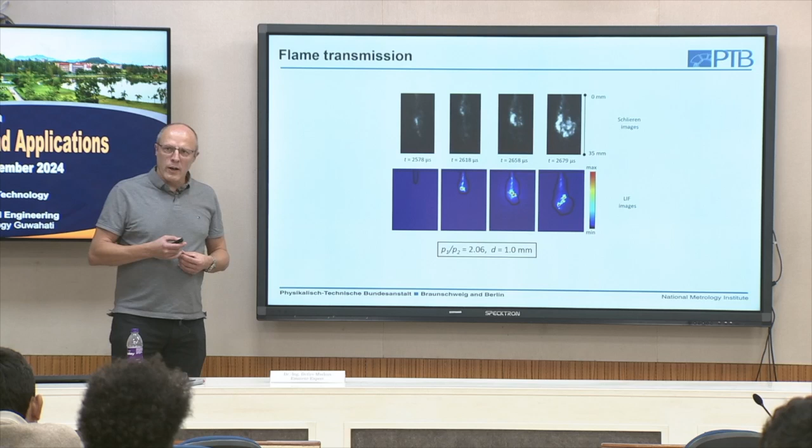Of course we see them, but also we see suddenly much brighter images at the tip of the jet. So here ignition has occurred, and this is a typical example I explained to you yesterday with the numerical part already. Here at the side we have a very large shear, so the mixing in this area is too large. There's mixing at the tip of the jet, but at the side of the center we have optimum conditions for reignition, and here it happens.

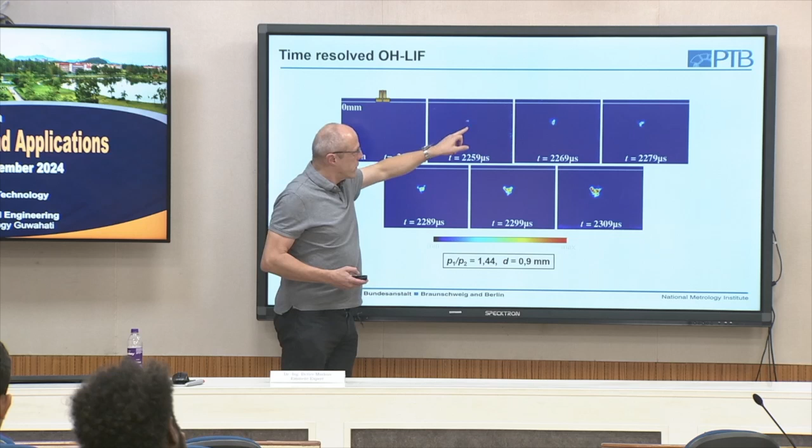More clearly here, we don't see any OH in the center of the hot gas, but suddenly, in the middle of nowhere, ignition occurs. We don't have a Schlieren image here, but this is in this region of the center of the tip.

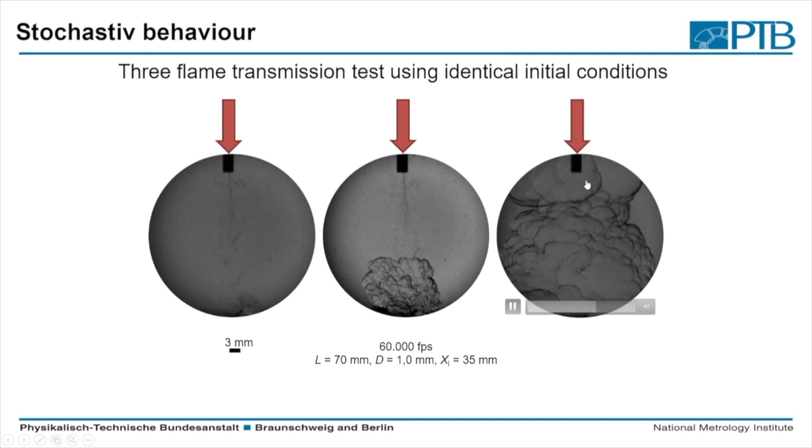This is a statistical process, so we can start at identical conditions. Here we have just the outflow of hot gas, nothing occurs. Here we have the ignition in a given distance. No, directly it was two ignition locations, so it was really interesting. It seems to start here at the top, somewhere here, and further away again at the center of the tip. So you see it's a very complex problem where we have to consider chemical reactions and different flow configurations.

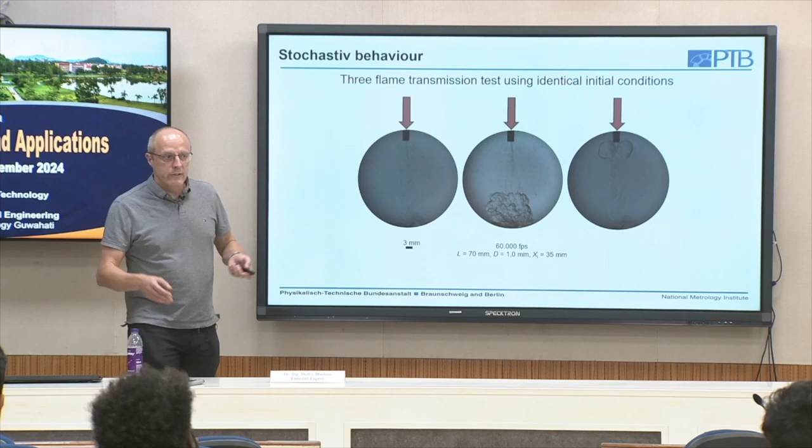So there's still some work to do, but the main outcome is we have an ignition at the tip of the jet.

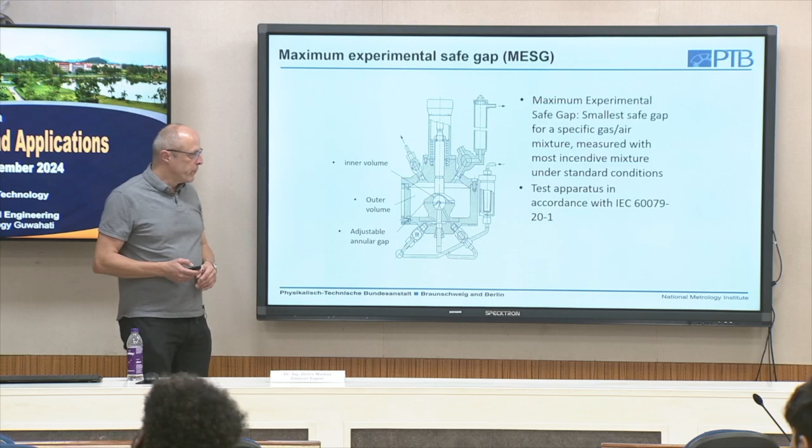So then finally we come to this MESG apparatus where we hopefully have this optimized flow configuration to yield the MESG value. Again, we have a small vessel, a larger vessel. We ignite here, and we observe is there a flame transmission through this gap, which we can adjust using a micrometer screw. Like the minimum ignition energy, we use this to classify our combustibles into three different gas or explosion groups.

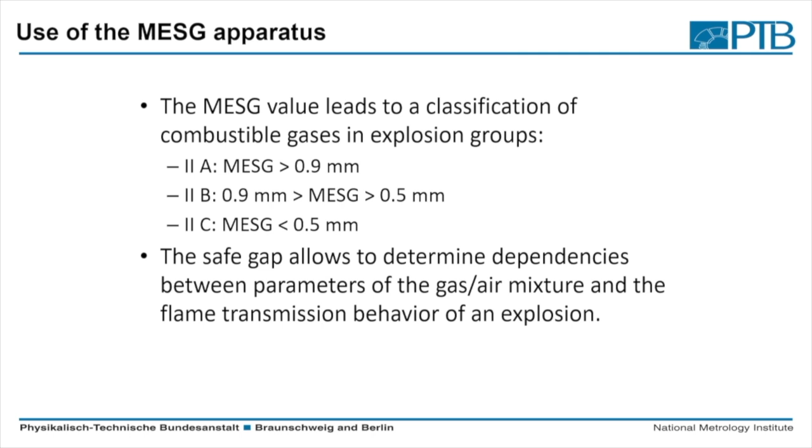So one important question is, okay, we classify our gases into three different categories. Is this classification, propane is easier to handle than ethylene, always true? Or what is happening if we increase the pressure? Is there suddenly a configuration where maybe ethylene is more critical than propane?

Temperature dependency we have discussed: the higher the temperature, the smaller the gap has to be. This pressure dependency we have discussed: an increase in pressure reduces also our safe gap. We need to stop flame transmission.

So I come to an end of this part. You have seen, if we talk about something like flame arresters, flame-proof enclosures, flame quenching, it's a complex problem where we have to consider different flow configurations, superimposed flow and so on, where we have, of course, to consider the chemistry of the combustibles we have.

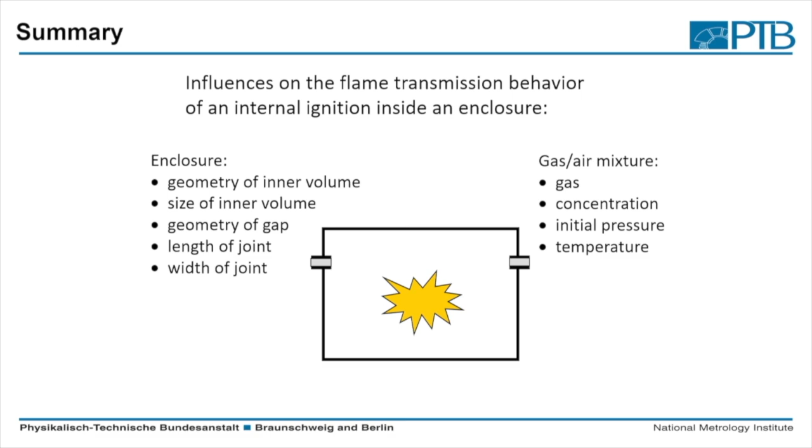So we are talking about an ignition event, and during ignition we have a very sensitive region, so a lot of radicals are involved, so it's very difficult to perform numerical calculations here with simple RANS methods, for example. You always have to consider the complex chemistry here.

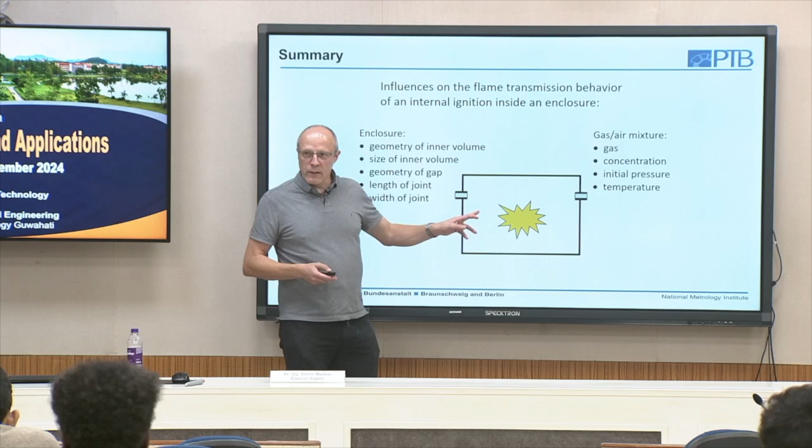And then, of course, we have an enclosure with complex inner geometry, and we have seen in the morning how this pressure piling effect can influence the explosion inside such an enclosure. So we do not have an empty enclosure, we ignite in the center and we have a spherical flame ball. You have seen at the beginning, of course, there is a complex interaction of the explosion flame with the inner geometry, leading eventually to pressure piling, much higher initial pressures until the flame reaches the gap. So the size of the inner volume is of importance.

So what kind of gap do we have? Have we a circular gap? Have we a flat gap? This is of course of interest. Then the length and the width of the joint, but also gas mixture concentration, initial pressure and temperature are of importance.